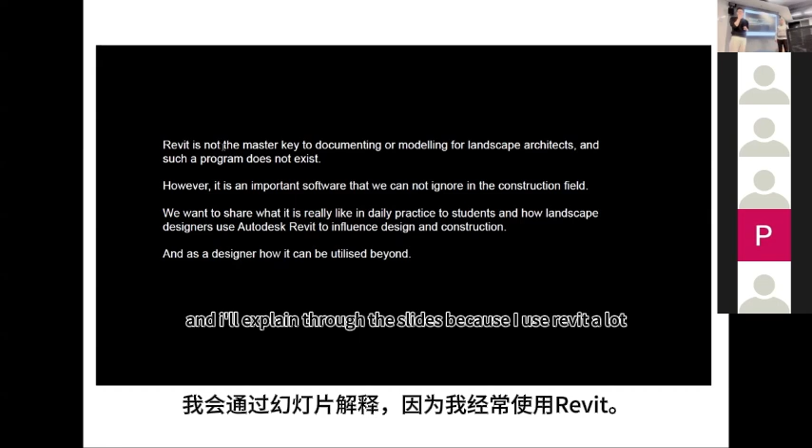So for this session, I'll say Revit is not the best program in the world or the only program you need to use. It's not going to solve everyone's job search or all projects. But it's very important to know and use Revit, and I'll explain through the slides because I use Revit a lot. But I also want to make sure you understand there's good and bad, like everything, and it depends on your scale of project, your personality, your style of working, whether you like design or delivery and construction. So it's not the best or ultimate program, but it is very useful and handy, and I hope you understand a bit more by the end of today's session.

We think landscape architecture is just designing gardens or green spaces, residential planting design. But nowadays we're doing a lot more - a lot of 2D, 3D, even 4D. We need to look at how it looks before and in the future with climate change. Also, a lot of us work in coordination and collaboration with different disciplines around the world, with civil engineers, sometimes clients, architects, and many different teams.

I also highlight that there's a lot of data now with AI and a lot of global scale projects, so we need to deal with a lot of numbers, different timelines, and different constraints throughout the project. When you put everything together into one model, it becomes very heavy and very complex. You need to somehow find the room to plant trees and make sure everything works. So I think we all understand the role - it's not just planting trees, it expands much further.

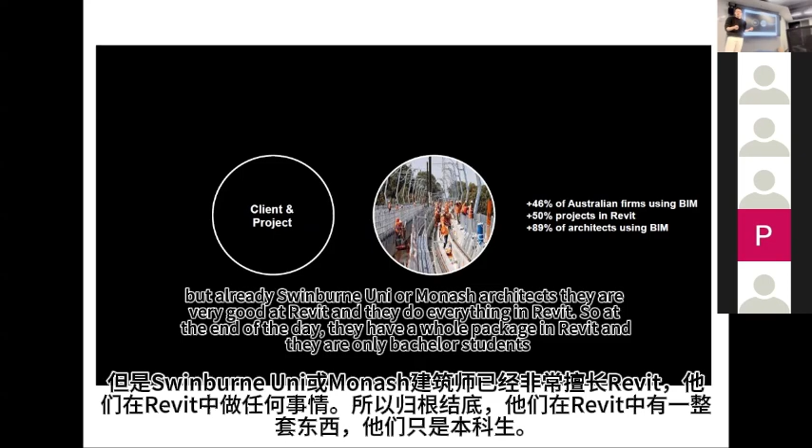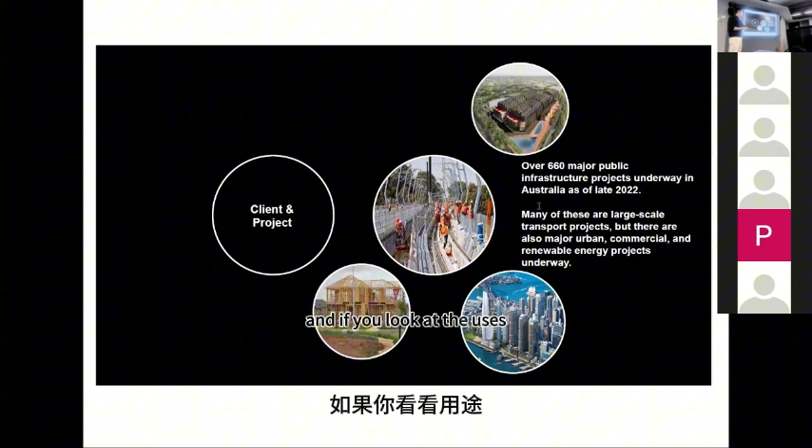Around Australia, residential, skyscraper, and data center projects are big infrastructure projects, and they just started booming after COVID. If you look at the news, they are facing the social housing issue, so they build a big road in the regional area and these kinds of houses just copy paste, but still they are building a lot.

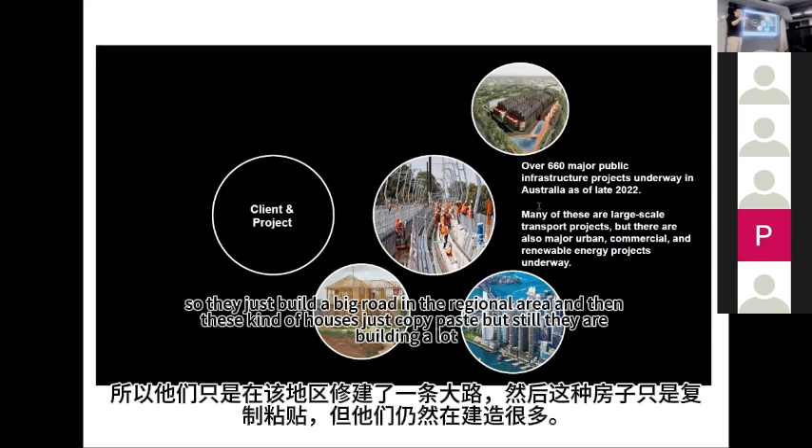All of these kinds of big projects are more or less done in Revit, because at the end of the day the government or the client wants to control all this data, how they can improve the costing, or how much energy people use.

This is just looking at Victoria, a big build. This is all the projects me and Chenyi also worked on. There's more than 200 projects already, and I'll say almost 190 projects are almost all in Revit and BIM.

I worked on level crossing, regional rail, Northeast Link—I'm still working on that—and SRL, and airport rail, which is not happening yet but will happen. All these other roads are almost getting built or near completion, but almost everything is done in Revit. I'll show you how and where.

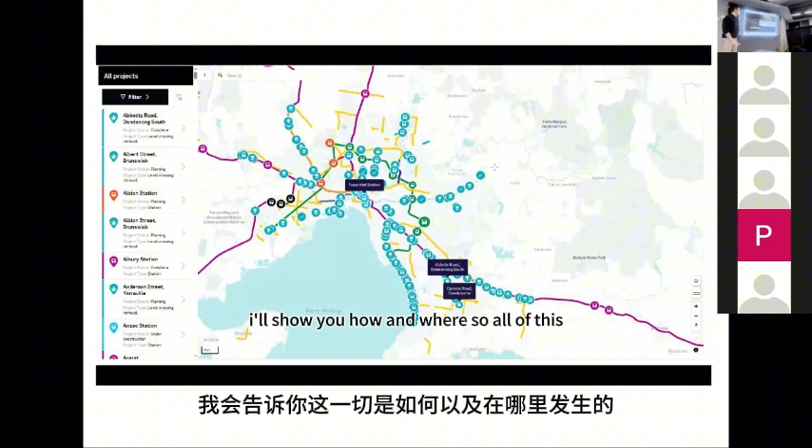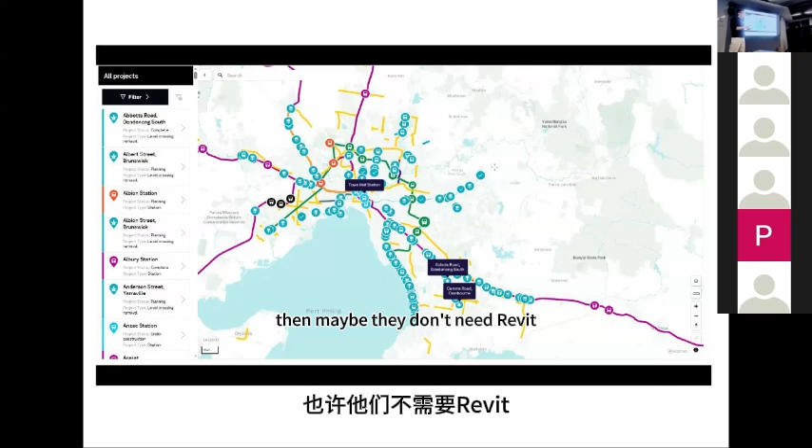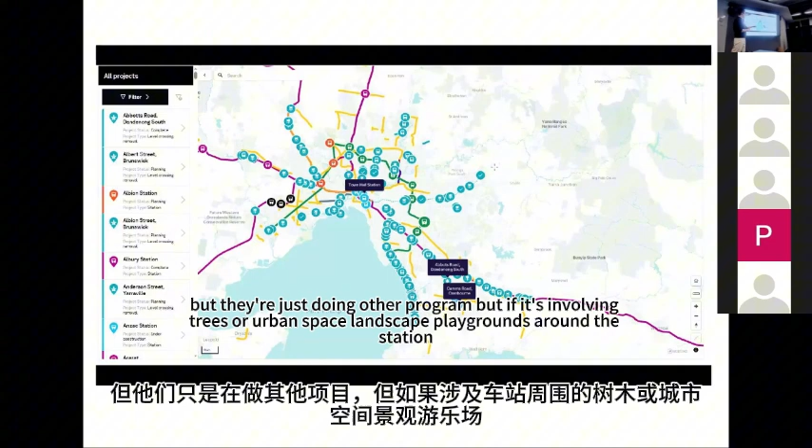So across Melbourne, all these little dots mean station or level crossing. If it's only road, then maybe they don't need Revit, they're just using other programs. But if it's involving trees, urban space, landscape, or a playground around the station, they will require Revit.

This purple line, the V line, goes all the way to Sydney and then all the way to Brisbane. They're connecting this inland interstate rail for the container shipping, so for them it's very easy to use Revit because it can cover large distances.

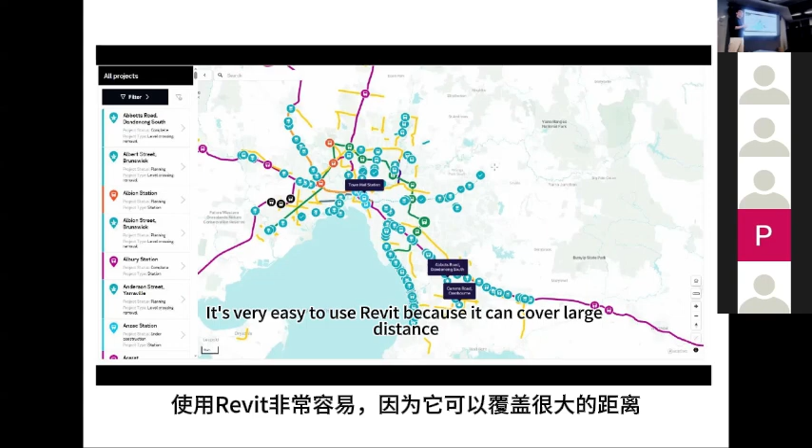The need comes from these people and the customers. A lot of customers want to use AI. Google, Amazon, Facebook, they are making it, and they all come to Jensen at NVIDIA because he's the only one who can make the good graphic card and the chips. He knows a lot of people need this chip, so he can control it, and everybody likes it.

I'll give you another example, which is like Labubu. Everybody wants it, so they can control the demand. If you can make Labubu more scarce, then you'll probably get more attraction from the client.

So this is us, and that's the client or the company who are looking for a job, and it goes back to what I said earlier—we're not just landscape architects. If you're good with coordination, then you also get picked by the client.

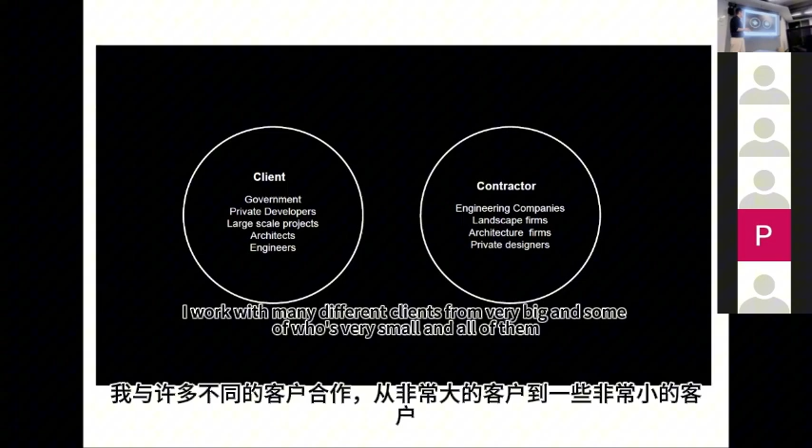If you look at me, I worked at an architecture company, a landscape firm, a private designer company which was smaller, and also an engineering company now at AECOM. I work with many different clients, from very big to someone very small, and all of them need Revit. So everywhere I go, for some reason they always use Revit.

When I was working, of course there are so many programs you need to learn, or they teach you. You don't have to use everything, but there are more programs you know, either because you want to, or because the client or the contractor needs drawings, models, and information—we need to do analysis, like how many trees we can plant.

They wanted to know the quantity of trees we can plant. They also want to see the render, to see everything get built and how they build through simulation. After you've finished the project, they also want to keep maintaining and monitoring the model. So all of this is contractors' work—this is the kind of role of a landscape architect right now.

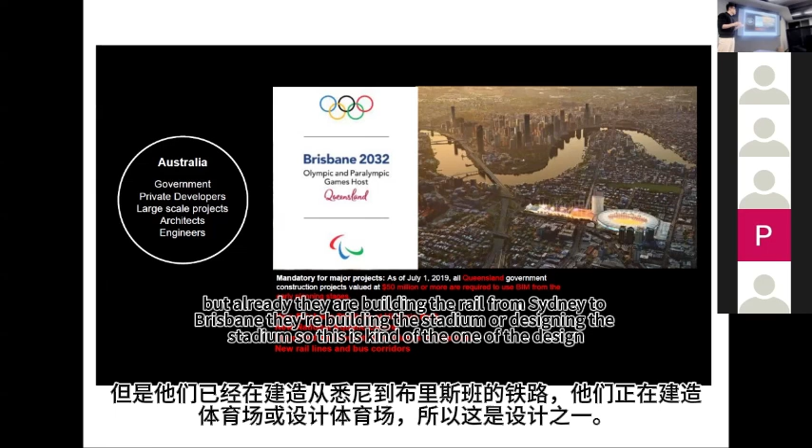This year is 2025, but they are building for 2032. So it's already, I don't know, 7 years later, but I can't say for 100%. Already they are building the rail from Sydney to Brisbane. They're building the stadium, or designing the stadium. So this is one of the designs. All of these, they need Revit pretty much.

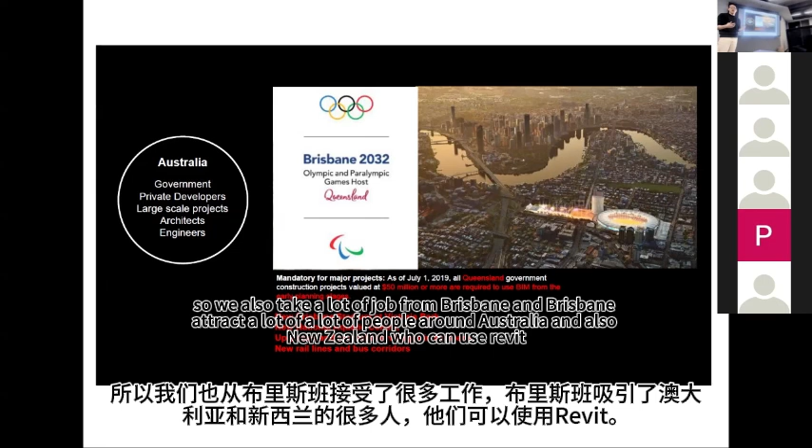And all the big companies are bidding for these projects, whether it's good news or bad news. Brisbane doesn't have many people, so we also take a lot of jobs from Brisbane, and Brisbane attracts a lot of people from all around Australia and also New Zealand who can use Revit.

There's also airports. I'm not sure if all of you know, but they're building a new terminal for Melbourne, a new terminal for Sydney, and a new one for Brisbane. I think the Perth one was almost $5 billion. So somehow they want to expand, building whole new airports all around Australia. Already, you can see they are building the Western Sydney airport, which is also in Revit.

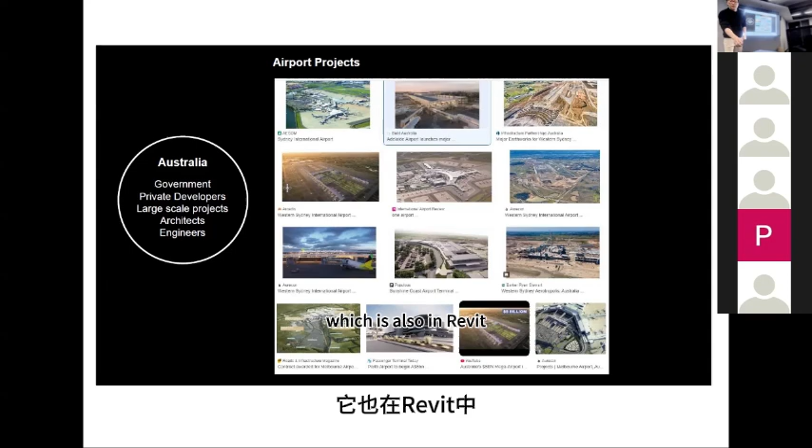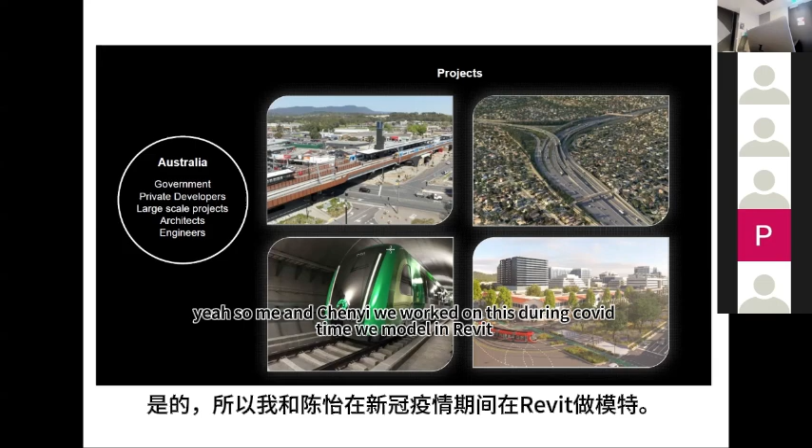Next page. This is kind of the output that me and Chenyi also worked on, like this one, which is built. So me and Chenyi worked on this during COVID time. We modeled in Revit even the small placement of the plants in this little garden bed. Even the painting on the ground, we also made the lines in Revit.

For example, this one, North East Link, it's getting built now. Of course it won't be as green, but everything you see on this render will be more or less done in Revit. It takes, I think, like a few terabytes to hold all the storage.

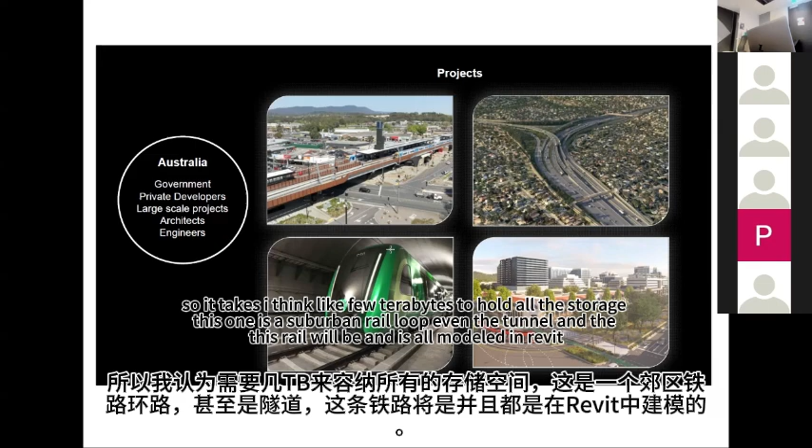This one is a suburban rail loop. Even the tunnel and this rail will be, and is, all modeled in Revit. I think I have a few more examples.

In Melbourne, you can see a lot of architects, and when we are at Aspect, they are all designed in Revit. Has anyone been to France?

The architects will design these forms and give us the file, and then you can see their changes from 2 minutes ago. If they hit save and then share, you can see them. And if you put something wrong, they will clearly see it, almost live.

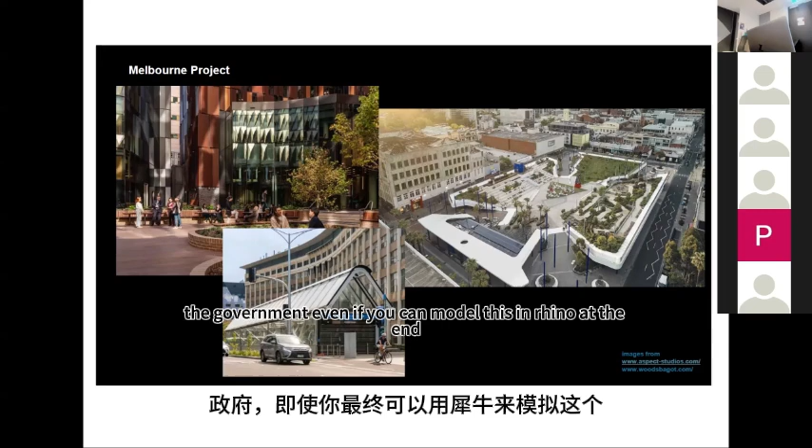And this Parkville station as well. Now, because of the requirement from the government, even if you model this in Rhino, at the end they want to see this file in Revit.

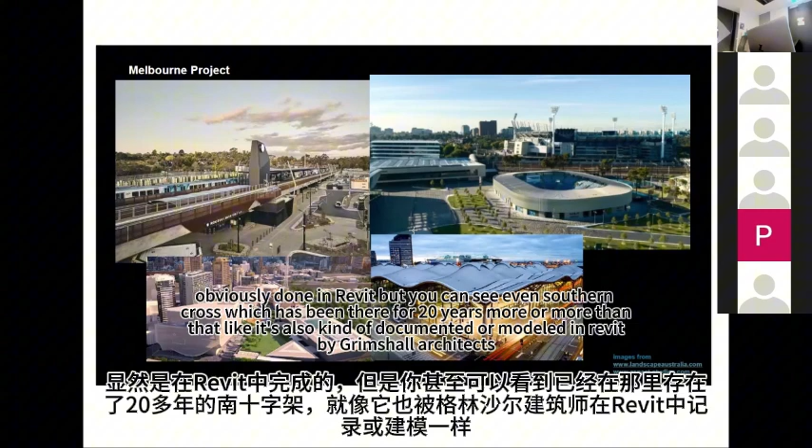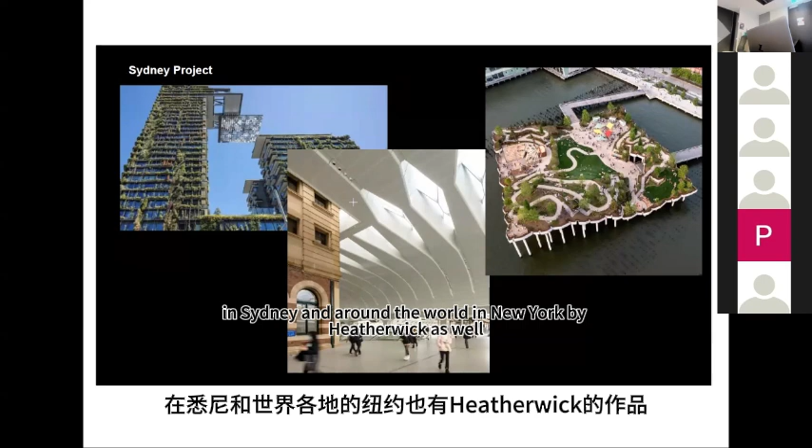A few more projects. For example, this NGV project, which will be happening in the future or now, will obviously be done in Revit. But you can see even Southern Cross, which has been there for 20 years or more, is also documented and modeled in Revit by Grimshaw Architects in Sydney and around the world, and in New York by Heatherwick, as well as the One Central stations and One Central building. They are kind of all modeled in Revit. Obviously it's been a long time, but you can see it's still very important now.

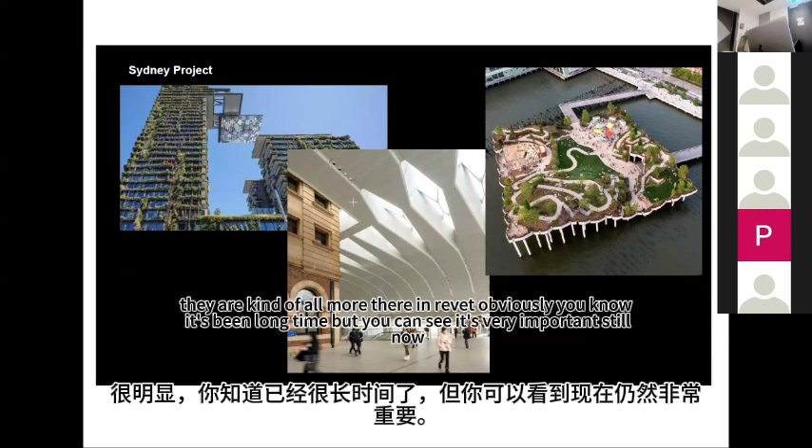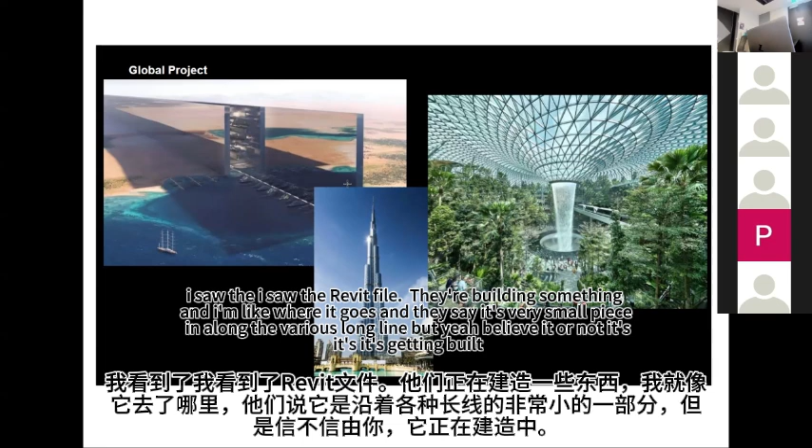Global projects, of course, the Singapore Airport, and the Dubai Tower and the Line. I'm not sure if anyone knows, but I worked briefly on it, so it's getting built. I saw the Revit file. They're building something, and I'm like, where does it go, and they say it's a very small piece along the very long line. But yeah, believe it or not, it's getting built.

So from this slide, I'll explain what happens in my daily life in AECOM, more focused in Revit. Almost 90% of the work is in Revit. I go to work at 9 o'clock, maybe a bit late depends, and then if I can't finish at 5, I'll try to finish before 6.

When I go to work, I will check my email, make coffee, chit chat for half an hour, and then start looking at design if there's design work. If not, I will document - if there's a markup or red pen from the client, or I need to model 2D to 3D, I'll use Revit for this documenting role.

Sometimes when people need help with rendering, I also do some rendering, mostly in Revit with plugins like Lumion or Enscape. I also do a lot of quantity schedules - pumping out the number of trees, the areas, and if it's too much beyond budget, then you cut. If they want to see options 1, 2, 3, you can do it very quickly because they're all interlinked.

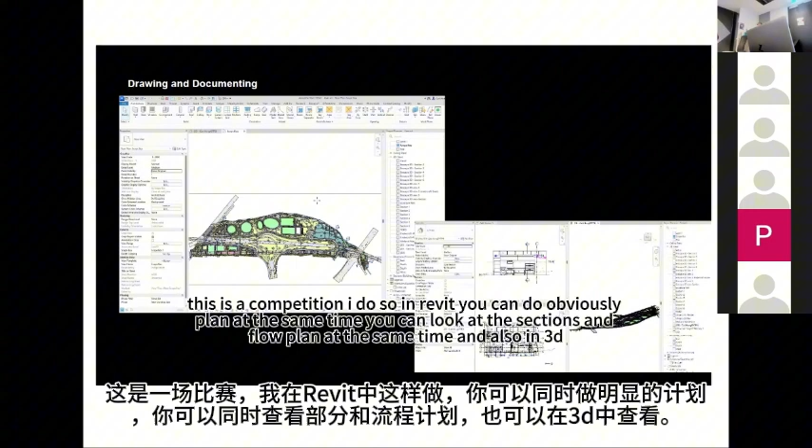For example, this is a competition I worked on. In Revit, you can do plans at the same time, and look at sections and floor plans simultaneously, and also in 3D.

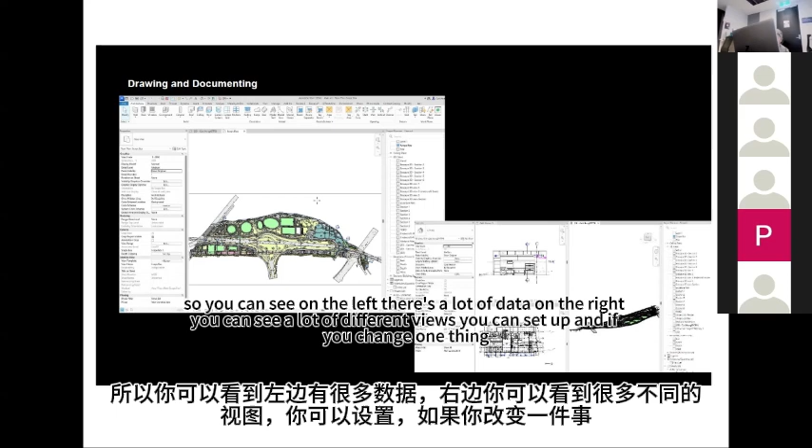On the left, there's a lot of data. On the right, you can see the different views you can set up. If you change one thing, you'll see the change everywhere simultaneously. You can see the scale of the project - it's very big, almost 1 to 3 kilometers long, but still you can make very quick changes.

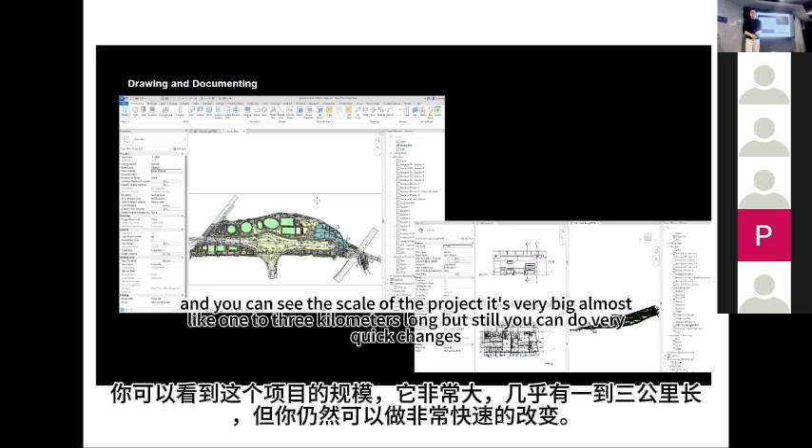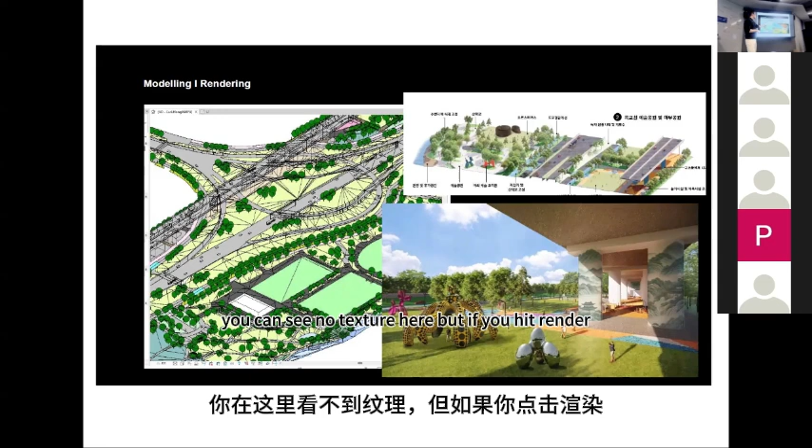Once you make changes, if you have Enscape or Lumion, the changes will come in live, and depending on your software or graphic card, you can see a higher quality render. So you can see no texture here, but if you hit render, the textures will all come up.

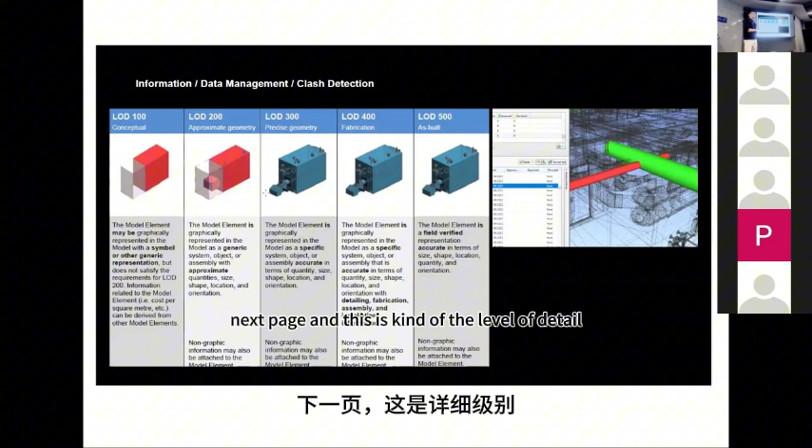This is the level of detail. In early stage, you don't need to model everything - you just make an LOD 100, which is very conceptual, just a box. If that works, then you go to the next step, next step, next step.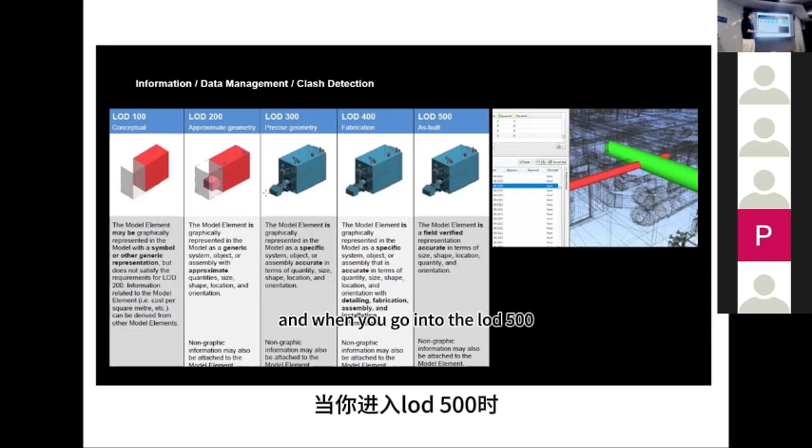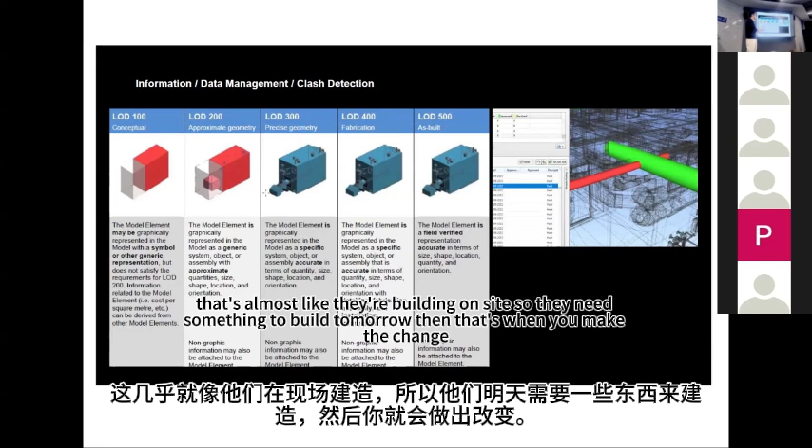When you go to LOD 500, that's almost like they're building on site - they need something to build tomorrow, so that's when you make the change, and it becomes very high in level of detail, meaning you need to put data even for a small bolt or a power point.

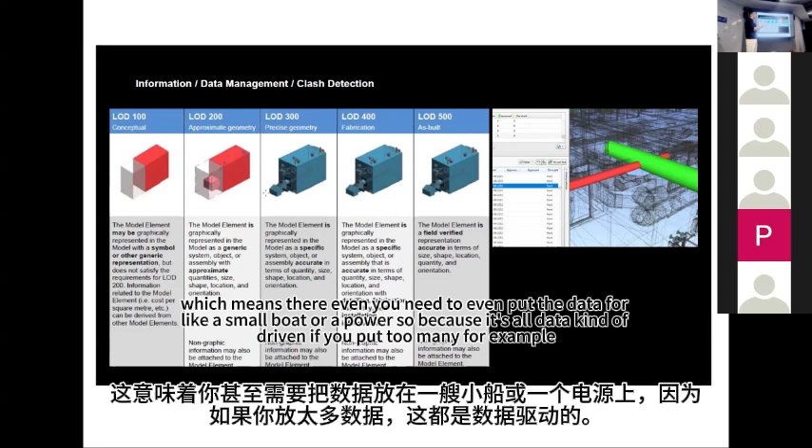Because it's all data-driven, if you put too many drink fountains or toilets, they can see, 'oh, we're not going to have enough supply' - you can catch a lot of issues this way. There's a lot of information embedded in the model.

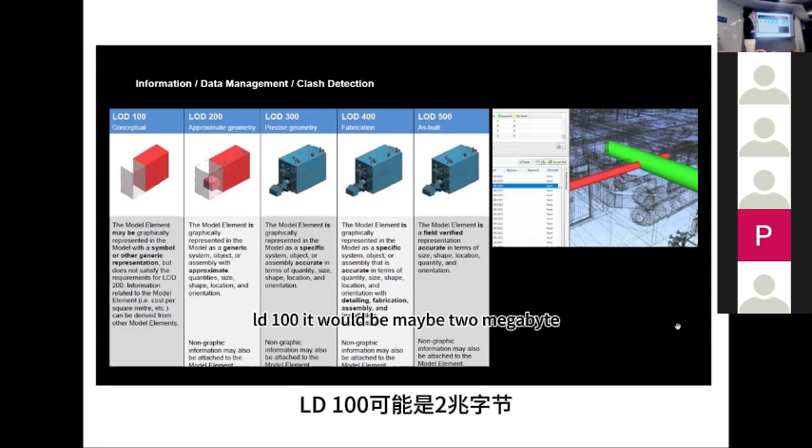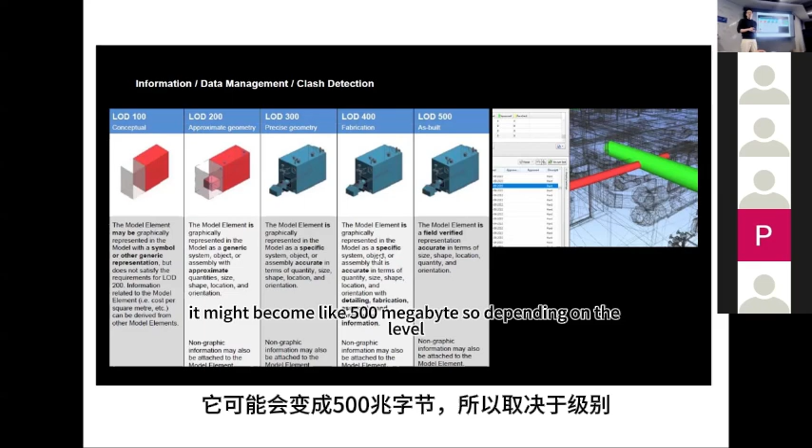For example, LOD 100 might be 2 or 3 megabytes. When you go to LOD 500, it might become 500 megabytes. Depending on the level, you can do a lot of different changes. You can also see clashes here - if you model something, you can see clashes right away and fix it. Mostly, my daily work involves fixing the trees.

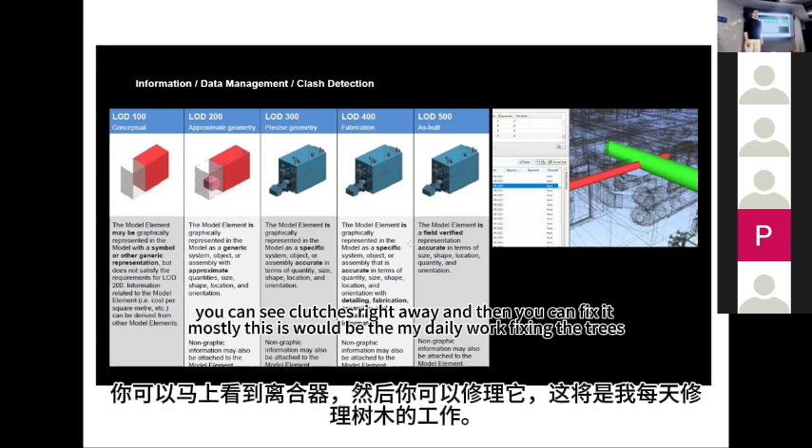So next page, it's just a quantity. This is very important because the client always asks us to cut the trees or remove the tree. They want to minimize the costing.

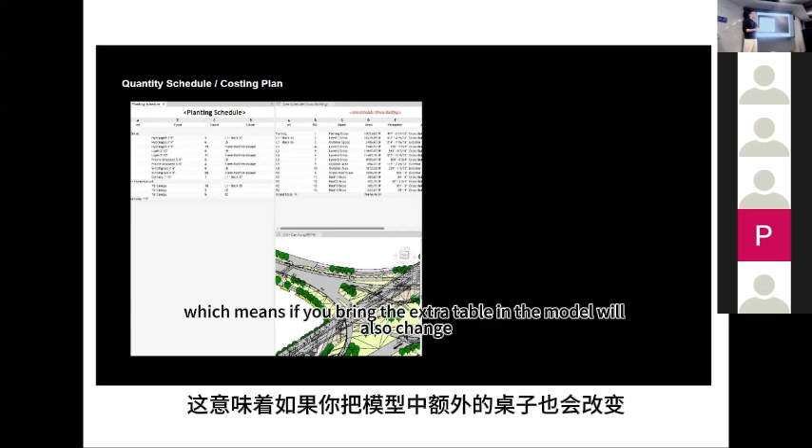So you can see how many garden beds or trees you need very quickly, but also because this is in an Excel table, if you bring the Excel table in, the model will also change. So if you want to change this tree family or model into 2 meters, if you change it in Excel and input it to Revit, it will all change automatically. So if you don't like the color or location, they link with Revit and the Excel or other tables.

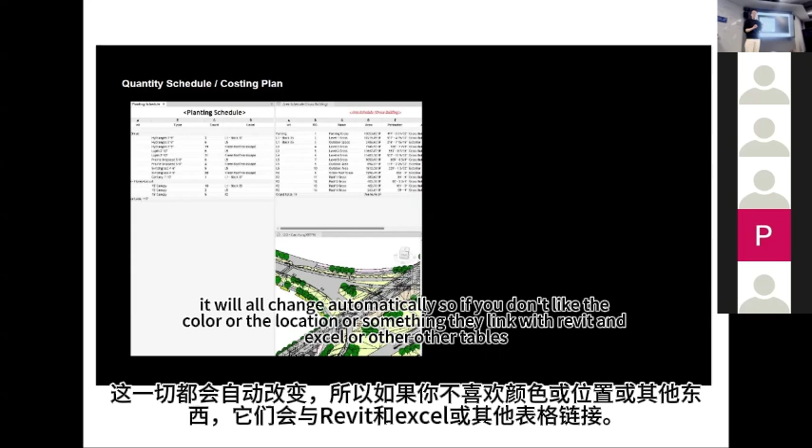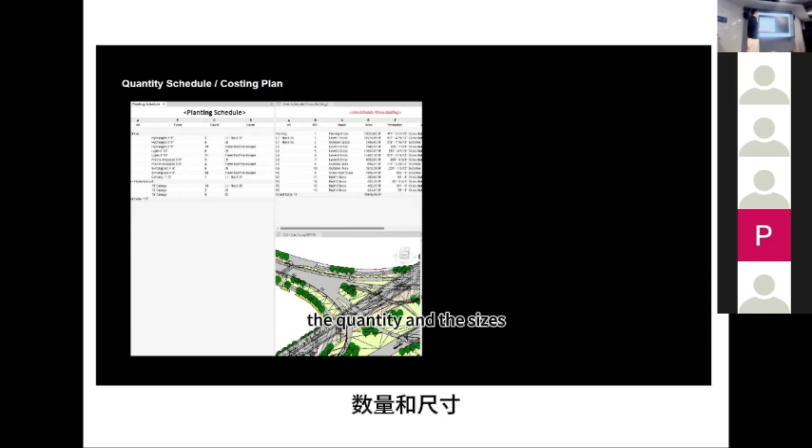Normally the client will ask how many trees we have, then I give them the number of trees, the quantity, and the sizes. And if they can't find it on site or in the nursery, they'll ask if we can have different types.

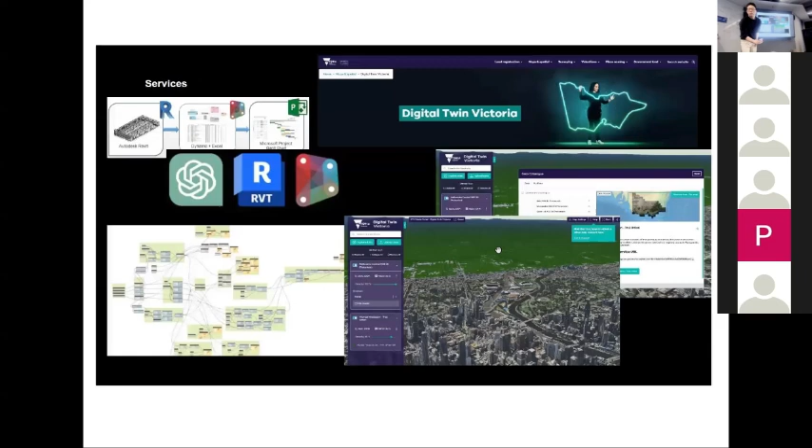If you know all of this, you can go to a higher level and more advanced sectors such as digital twin Victoria. After you do all the big projects, it goes into this website by the government. What they do is see, what happens if we change this Swanston Street? Where will people go? How many people will use this toilet or drink fountain? Or where will traffic collisions happen?

You can also see the tree data beyond Dandenong. More or less, they try to bring these old projects into digital, and new projects into this digital twin, so they can see where future developments can happen.

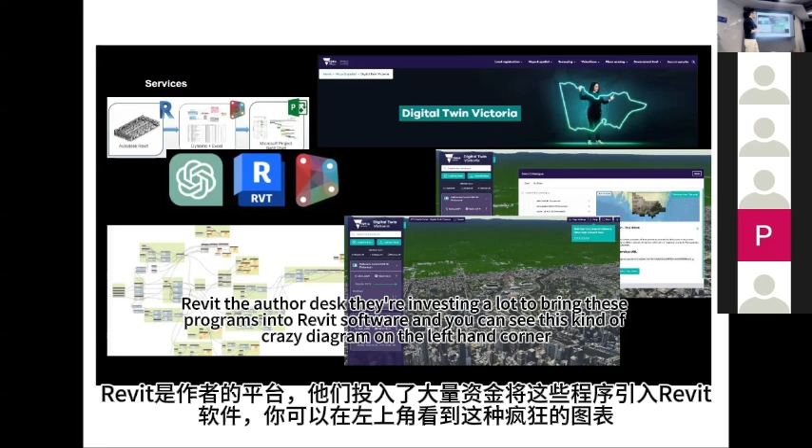I put this here like ChatGPT and other plugins. Autodesk is investing a lot to bring these programs into Revit software. You can see this kind of crazy diagram on the left-hand corner, which is like scripting. So if you have a lot of crazy ideas, you can make them like in Grasshopper, and in Revit you can do that too.

I know a lot of RMIT and Melbourne Uni students use Rhino, and a lot of company architects still use Rhino a lot. I also use Rhino for parametric shapes and stuff. There's a lot of debate between Rhino and Autodesk because Rhino is a bit more free.

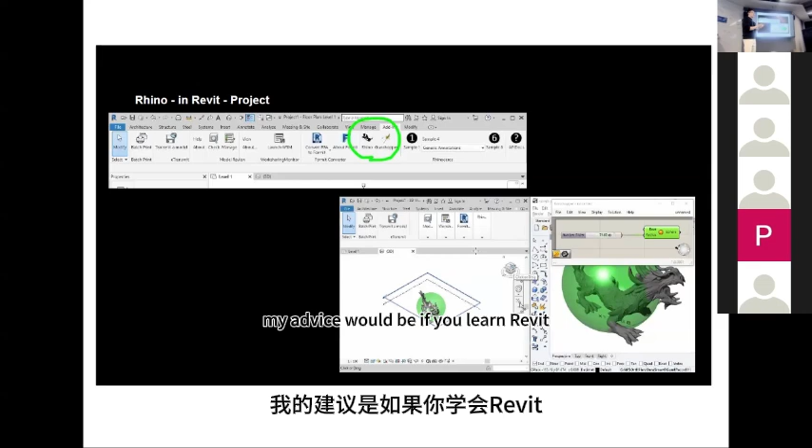My advice would be if you learn Revit, you can also work in Rhino. Basically, you open Revit, and in Revit there's a Rhino option. So for example, with this complex model, or if you have a Rhino model, you just open and bring it in. Then in here you can add all the data or the file, and change it.

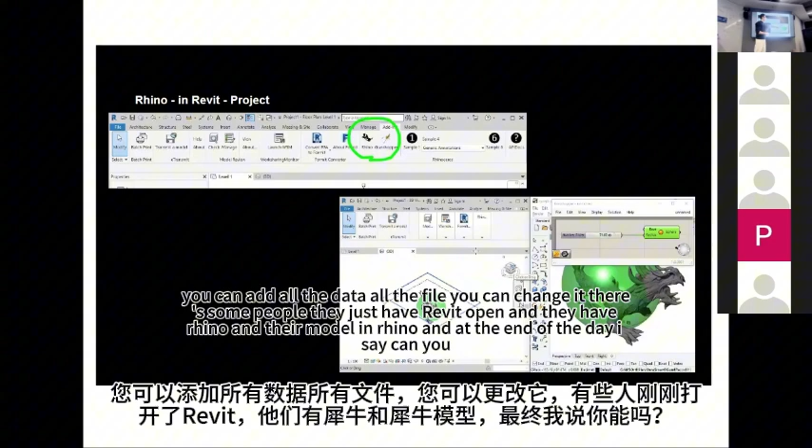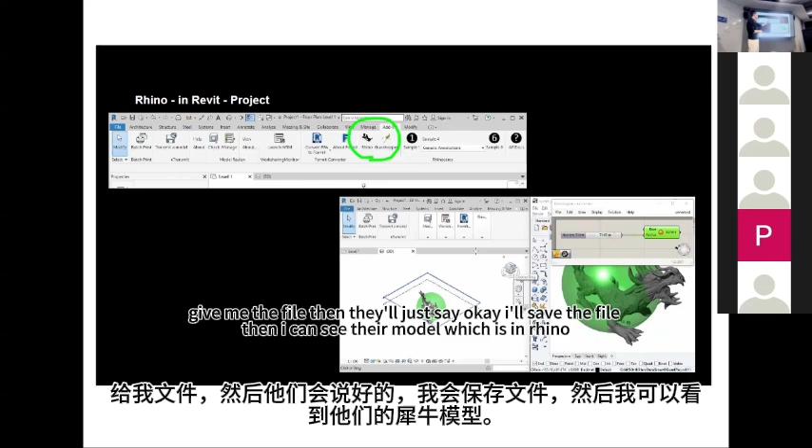Some people just have Revit open and they have Rhino, and they model in Rhino. At the end of the day, I say, can you give me the file? Then they'll say okay, I'll save the file. Then I can see their model, which is in Rhino, in the Revit file.

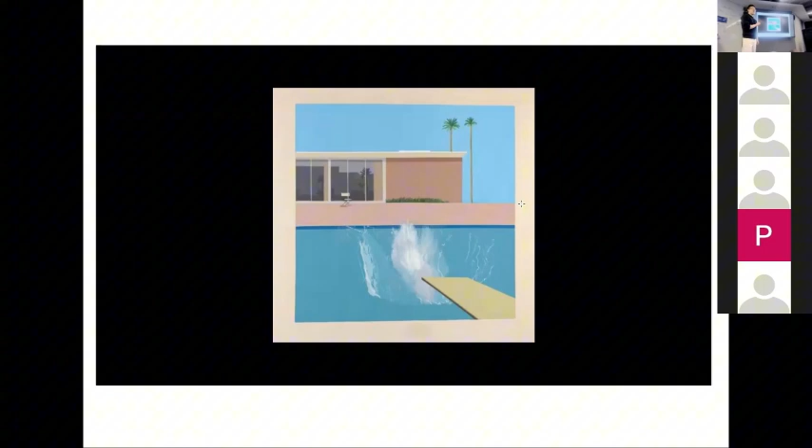Does anyone know this painting? No? Yeah, got it, okay... internet. No, internet? Okay, very, very expensive painting.

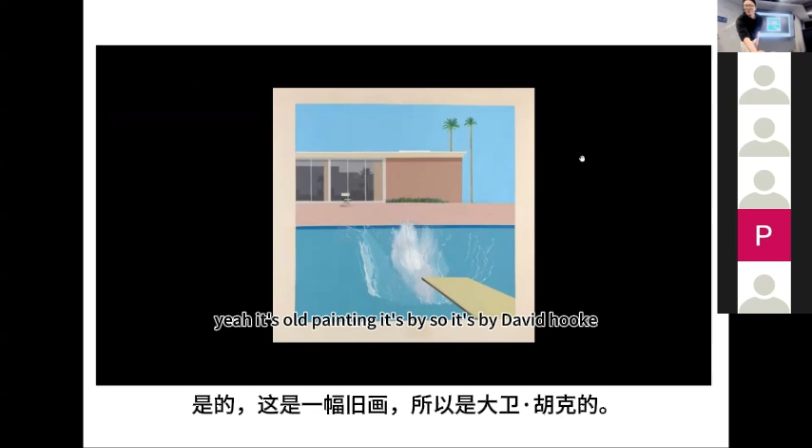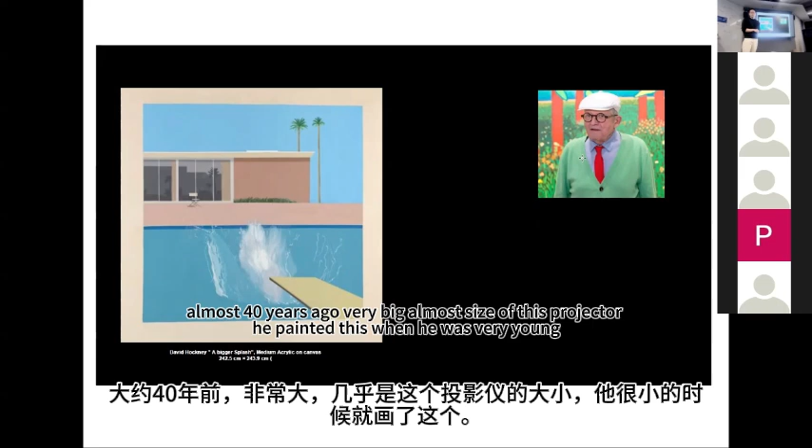Yeah, it's an old painting. It's by David Hockney, one of my favorite painters. I put this because you can see this painting was done almost 40 years ago. It's very big, almost the size of this projector. He painted this when he was very young, maybe 29 or 30. After that, he made so much money he didn't need to work, but he still works, he still paints.

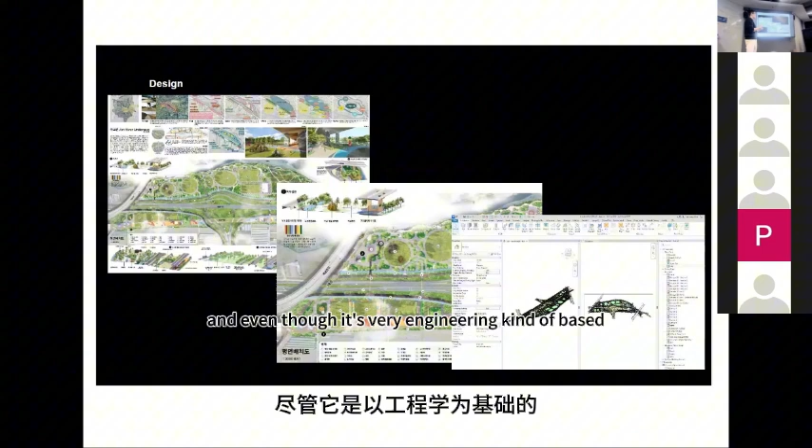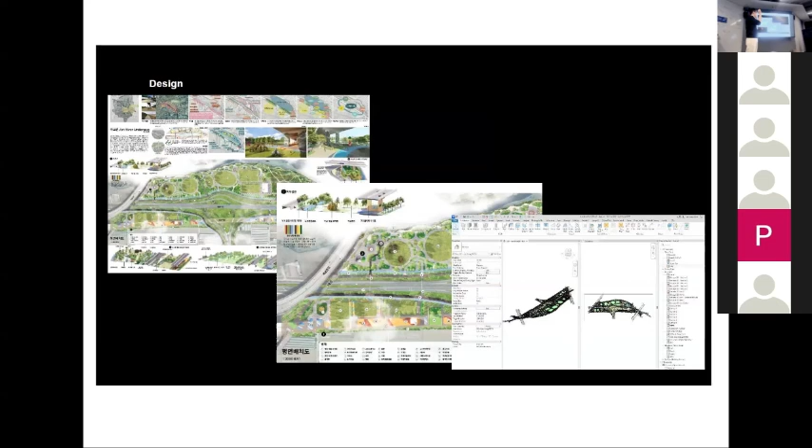And even though it's very engineering based - most of the Revit program is for architects, like wall, pipe, floor or roof - you can still do a lot of design work. So if you're comfortable with the skills, the program doesn't really matter.

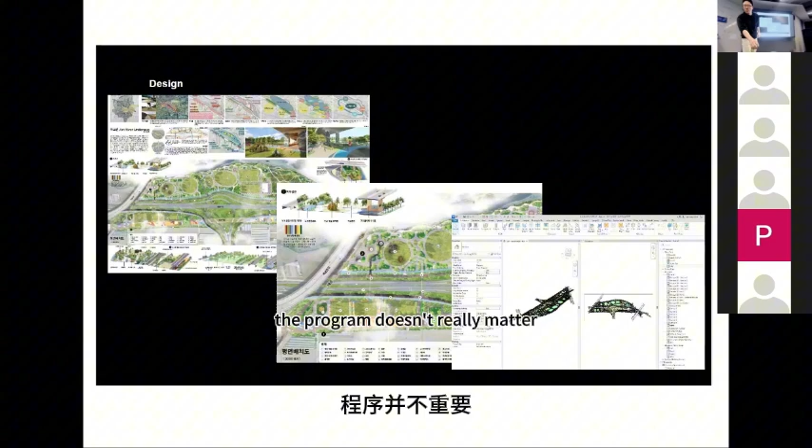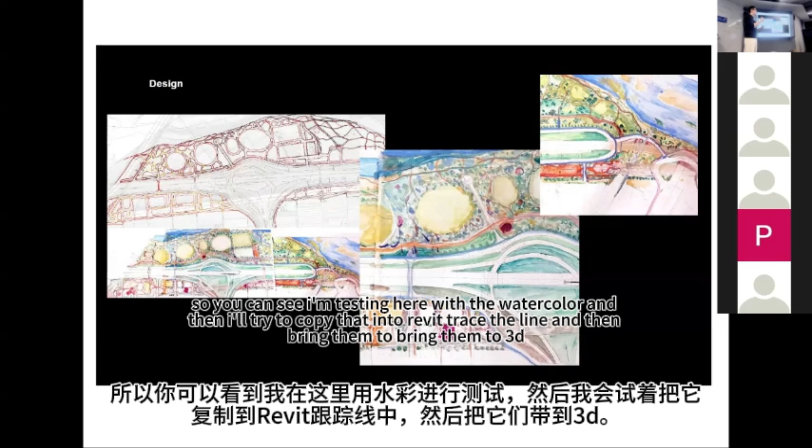So you can see I'm testing here with watercolor, and then I'll try to copy that into Revit, trace the line, and then bring them to 3D. Maybe I'll ask - can anyone guess how many programs I use for example this render?

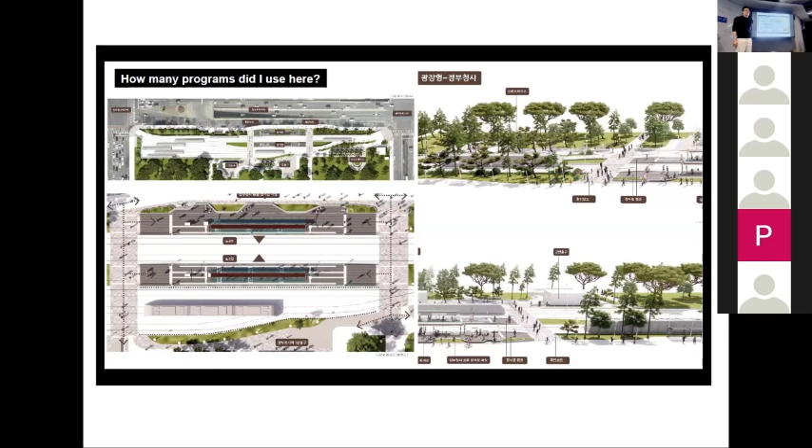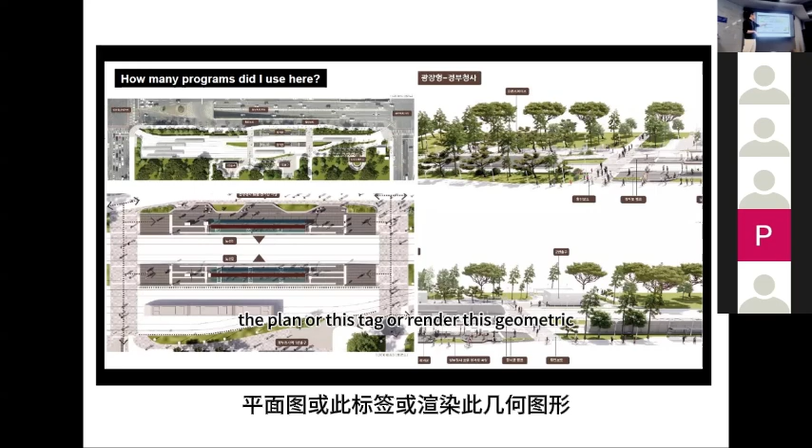4? Less than 4? 1? Almost 1, yeah. So I use 2 - InDesign to bring all the images onto the panel. But the plan, the tag, the render, the axonometric, even the writing or putting the text and the arrows, you can do pretty much all of that in Revit.

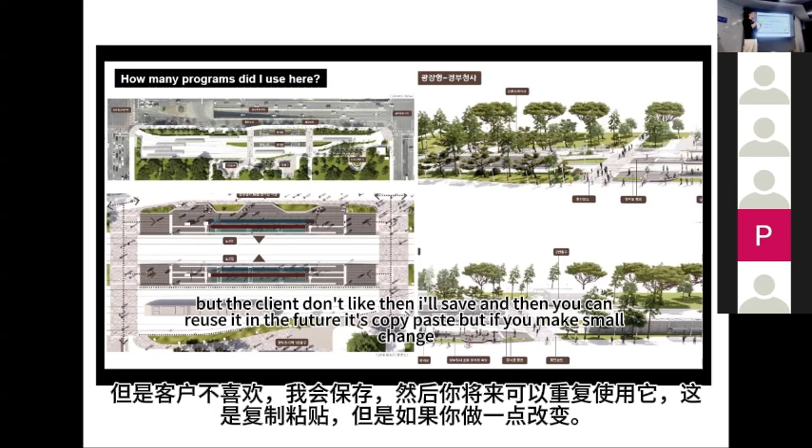So if you have free time, I'll do this. And if I have an idea when I'm working but the client doesn't like it, I'll save it and reuse it in the future. It's copy paste, but if you make a small change, it's very fast because you already have the template and the old project - it won't be too crazy for the next project.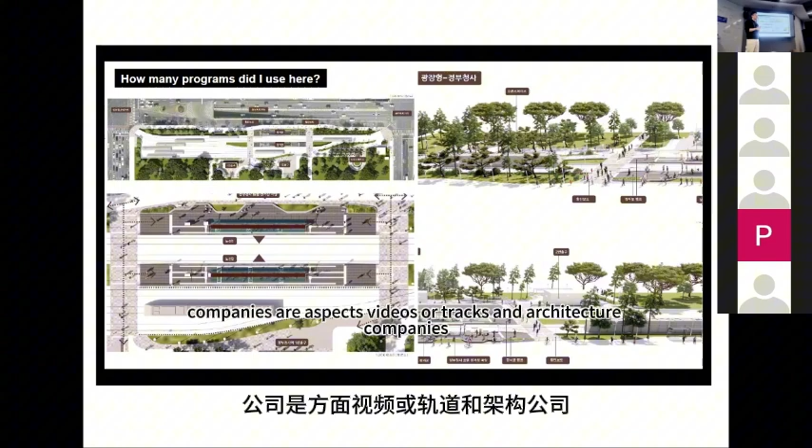So there's a lot to learn from the old project, and slowly you get better and faster. If you go to big companies like Aspect Studios or Tract, architecture companies, they will probably have a lot of data already. So what you do is model something, and they'll have all the full data from their previous projects - you don't even have to make new things.

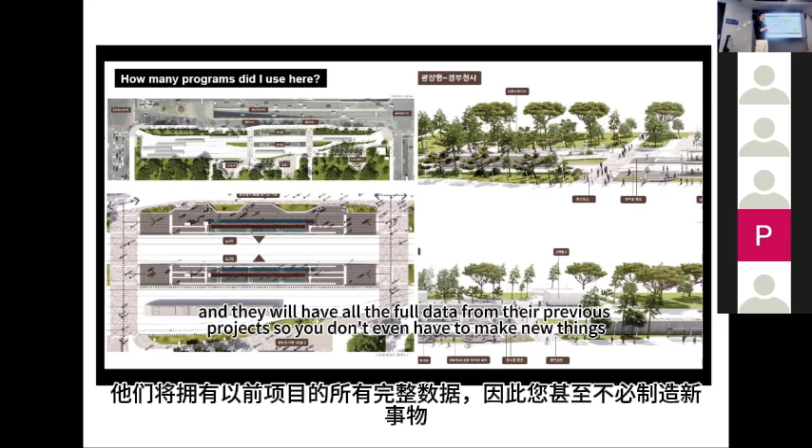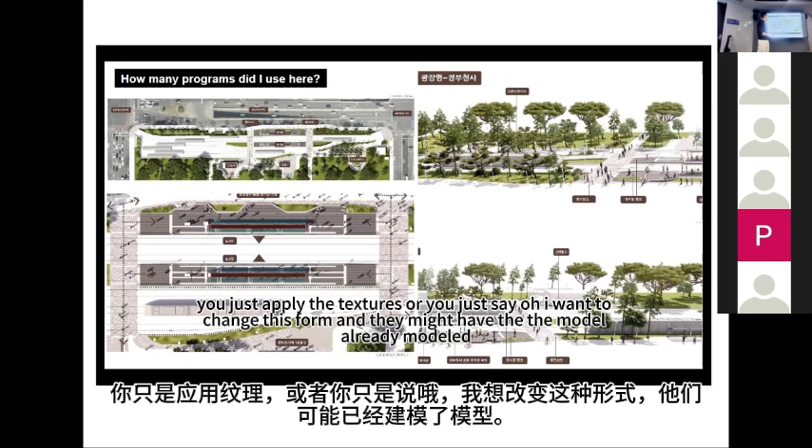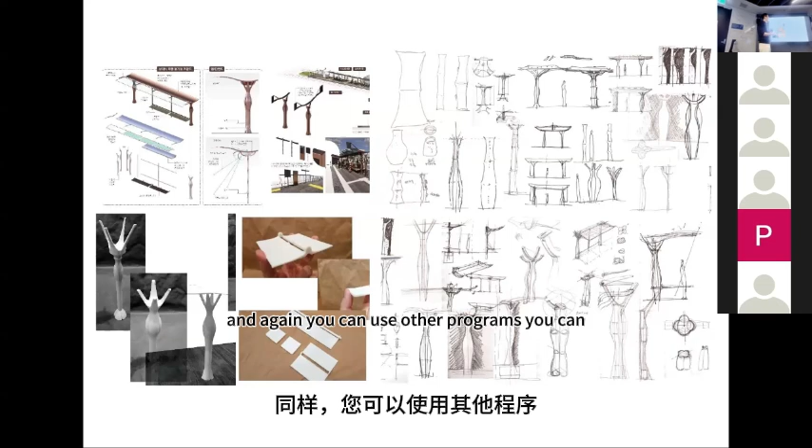You just apply the textures, or you just say, oh, I want to change this form, and they might have the model already made. And again, you can use other programs - you can push to 3D printing if you like. If you like sketches, you can bring them into Rhino, or in Revit you can trace it.

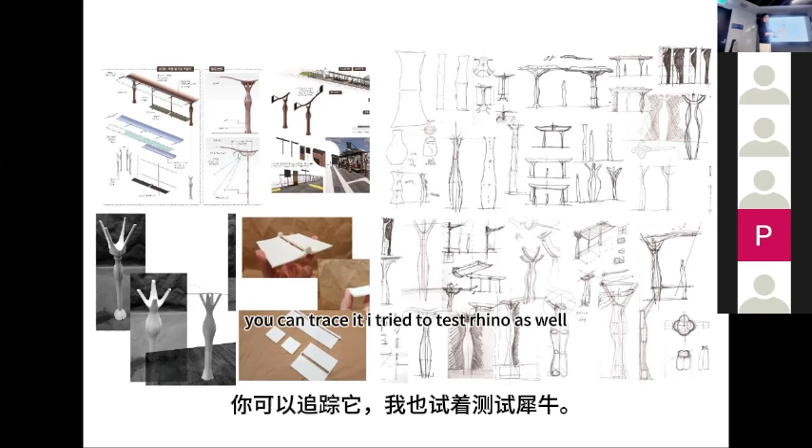The only thing is, in their time, maybe 1920, 1950, or before, they only had a pen and ruler, or ink, or maybe an eraser. Of course they didn't have a computer, so they couldn't work on a small screen and zoom in and out. So if they made a mistake, they needed to redraw everything. But essentially, it's just a tool - all the programs.

But I think, for example, Revit will be a very important tool - like the last slide - it will be either like a ruler or ink. You can still find something similar to draw a straight line or use a pen or pencil, but I'd say it's very essential to learn Revit if you want to work on future projects in Brisbane, Sydney, Perth, or even Saudi projects. Yeah, I think that's the last slide.